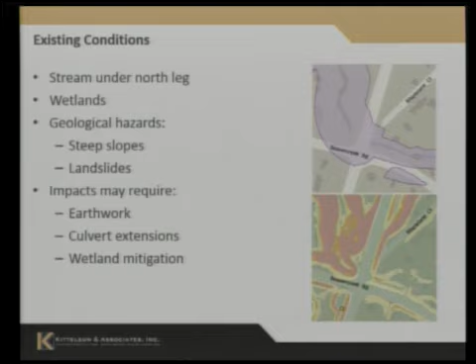That tells you a little bit about some of the facilities there, but this road is placed in a very interesting location. As many of you know, there's a lot of constraints. There is a stream that runs under the north leg of the intersection. We have wetlands surrounding that stream, both in the northwest and northeast corner of the intersection. There's a lot of steep slopes and geological hazards. There's been some landslides that have occurred northwest of this intersection, up the same creek that crosses under the intersection.

And we know that anything that we do to this intersection, if it requires the back of that sidewalk to move out because we're widening the road or moving the road, anything we do that might change the full footprint of that intersection is going to likely require extensive amounts of earthwork, culvert extensions, wetland mitigation. And so you'll see that we have some pretty large ranges on our cost estimates. So to really refine that, we're looking to see which ones seem palatable, if any, before we dive to a deeper level. But we know that there's a lot of challenges with this intersection for anything that would change the footprint.

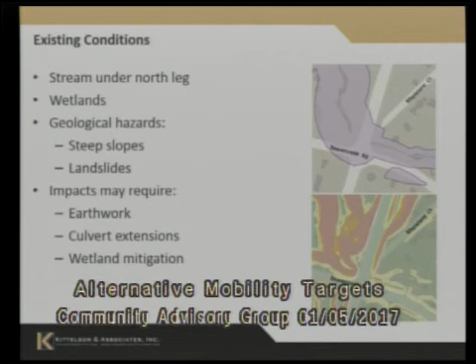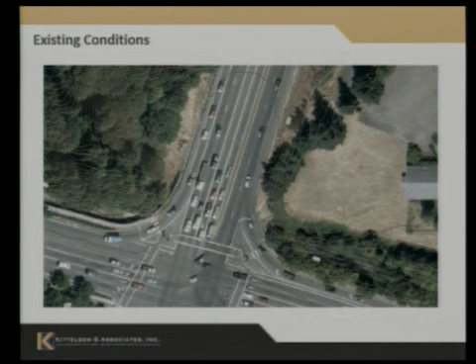So from operations, by operations we're talking about traffic. We mentioned earlier that the standard for this intersection is basically 0.99. We went back and looked at what was in the TSP when the TSP was created, looked ahead at what was projected for the intersection, and looked at traffic volumes today. What we've been seeing is that traffic volumes have been growing about 2% a year since the TSP was updated, which is consistent with the growth rates in the TSP. That was a validation for us that we're still pretty confident in the TSP projections, and we are anticipating slow and steady continued growth at this intersection.

From a safety standpoint, that is a high collision intersection. We looked at crashes from 2010 to 2014; that data doesn't become available immediately, so 2014 is the last year of full data. Statewide, this intersection is in the top 5% of what ODOT assesses as its highest crash locations. A lot of this has to do with drivers' expectations of the traffic signal when they're headed southbound coming from 205. It's a very rural expressway, as you know, and people are oftentimes startled coming upon the intersection.

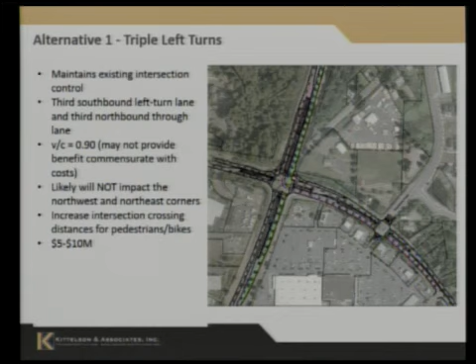At the end of this, and at the end of Susie's presentation, we'll welcome your questions and comments about any of the alternatives. We'll loop back around and walk through them one by one. And the outcome of tonight, what we're looking for, I think it's shown right there on the agenda, is, should we further investigate any? If so, which ones? So which of these should we carry forward? And then that third question, should we proceed with investigating alternative mobility targets or proceed with both? My hope would be to go around and hear from everyone before we close, but have an open discussion before that. So just wanted to provide a moment before Susie rips through these next 7 alternatives.

Good luck. Thank you. Thank you. Oh, you're right. It's a good reminder. I've got like 12 minutes. A minute and a half per alternative.

I'm going to spend a little more time on the first 4, and I'll go faster through the last 3. But yes, that is a good point. That is something that in our last hour of discussion is kind of some thumbs up, thumbs down, gut checks on do any of these solutions look like things, both from a physical standpoint as well as a cost standpoint? Does it tell you, yes, this is something I'd like the city to still consider, or no, this is just going to be far too expensive or too impactful?

So the first alternative includes constructing 3 left turn lanes coming off of 213, southbound lefts, so coming from 213 onto Beaver Creek Road. And the pink and the green doesn't mean anything in particular other than these are the new lanes. So it's triple left, southbound left, and so that would require some widening of 213, a little widening here to accept that left turn, and that third lane would probably have to extend all the way to the last shopping center driveway. And then in tandem with that, we would construct an additional northbound through lane on 213.

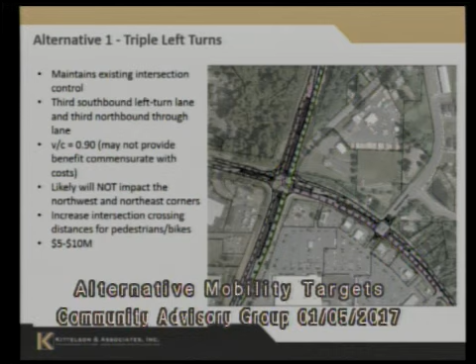We think it is likely to not impact the northwest and northeast corners. We think that this widening can be done within the existing back of pavement. It does increase the crossing distances for bikes and pedestrians on essentially three legs. It would make this crossing wider, as well as this one wider when we add the through lane.

But our cost estimate on this is still high, but I'm calling it the mid-range for today, in the $5 to $10 million range. And as I said, a lot of that has to do with whether we can do this with or without impacting these retaining walls.

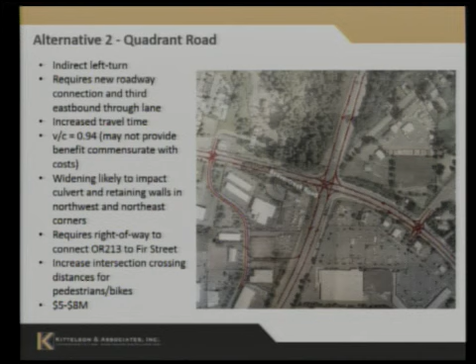Alternative 2 is called the Quadrant Road. Essentially, it would be instituting an indirect left turn. So that means you would no longer be making a southbound left here. To make this southbound left, you would go through the intersection, make a right turn, make a right turn, and come around. So this was really only getting us about a 5% gain in capacity.

And what we learned through the advisory committee meeting was that this property right here has a development application that's been approved. So this property is essentially under development at this time, not making it as great a connection as it looks in this aerial. And there are some problems moving it further south with developments, and moving it further north is just not enough distance from the intersection. Our technical advisory committee didn't feel really positive about this alternative, but they thought it was interesting.

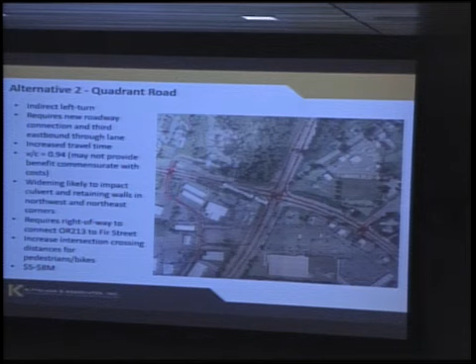One of the drawbacks is that now, instead of making a left turn here, those people who were turning left now have to go through the intersection twice. So it does provide some benefit, but I don't know that the cost benefit is necessarily there.

Susie, if we could share that the technical advisory group did recommend, is it 1, 4, and 6 to be carried forth? Did I get that right? Just to provide the benefit. So maybe after we go through 1 and 3. 1 and 3 just going forward. Yeah. Okay. So the committee still had concerns with alternatives 1 and 3, but for context, for your own thoughts, 1 and 3 seemed to be the best solutions of these 7 to the technical advisory committee.

However, ODOT raised concerns with the CFIs. They didn't say that they wouldn't approve them, but at the staff level, they basically said that these are very problematic, I don't know if we would approve these. They do exist in other places around the country.

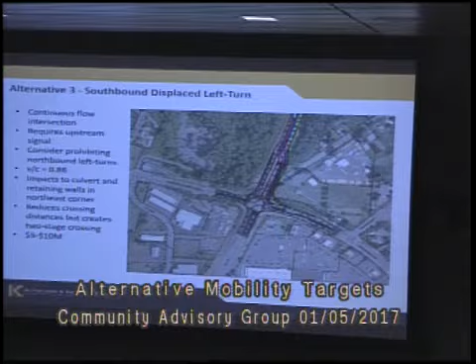Sorry to interrupt there, but I just wanted to say that you have the benefit of the technical review coming before you. Thought I'd just share, because I know we're getting strong reactions against number 2 already. Just wanted to say you're not alone. So thank you. Keep going.

And there was quite a bit of interest in alternative 3, which I'm going to be talking about right now. But I think the concern was still that it is a new intersection type, but I think it's one that is going to be starting to show up in more locations. They would be pretty new to Oregon, but they are very popular in other parts of the United States, not just internationally. But there was concern about whether this could be done within the retaining walls or not, and that would be a pretty major factor in the cost estimate. So 1 and 3 look like having the most potential, still with some concerns, but maybe warranting additional investigation.

Yep. So this is what we call displaced left turns. You're still allowed to turn left at the intersection, but what this treatment does is you have a second small traffic signal upstream. If you want to turn left here, you get into left turn lanes early, and you stop, or you might have a green, and you cross the road, and you come here, and you wait till you have a green. And then essentially the left turns get to go on the same green that the throughs get to go on, southbound as well as northbound throughs.

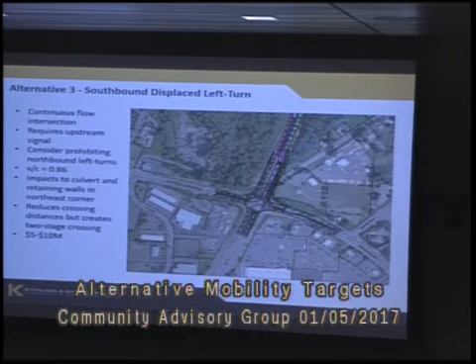So now you're able to move southbound lefts, southbound throughs, and northbound throughs all at the same time because you have moved those lefts to the other side of the roadway. And you've done that at a time when there was a gap in the signal, so you're really not creating additional delay to get through that intersection. They're coordinated. It's essentially the same signal. You end up with a different signal head here. I know this sounds technical, but it's the same controller, so it's one intersection, and you're controlling everybody together, but you're crossing those lefts in advance.

This would also require the construction of a right turn lane. And I think the real concern from a constructability standpoint on this was the widening, any potential widening in this section of 213. So this VC you'll see is 0.86. That's the biggest bang for those dollars that you've seen out of any of those alternatives that I've showed you so far. So I think this is what's really attractive.

It's a big gain in capacity for not a major improvement. And in other locations where you don't have these kinds of geographic and environmental hazards, this type of improvement is much more economical.

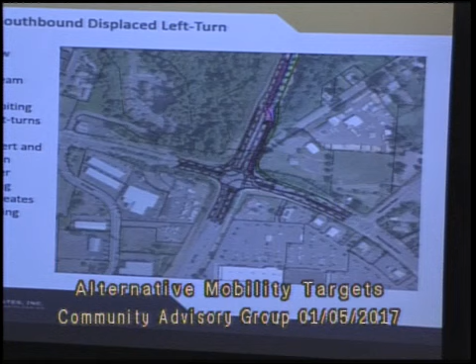So alternative 4 was essentially doing this type of treatment for 2 legs of the intersection instead of just one. So I already showed you how the southbound lefts would cross over, and they would be able to travel with the northbound and southbound throughs. This is showing that we're actually doing it for the eastbound lefts as well. Eastbound lefts, they get into their left turn lane early, right here. They have a signal that tells them when they're allowed to cross over into this storage area, and then they get a green and can turn left at the same time as these movements.

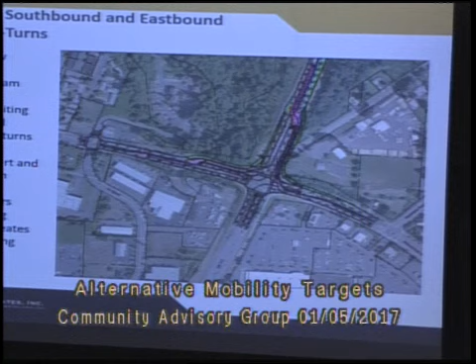And so this resulted in a volume to capacity ratio of 0.81, a little bit of improvement over doing just one leg. But this definitely has pretty severe impacts to the retaining wall and the wetlands and the topographic impacts here, which is why this has a substantially higher potential price tag.

That's the end of the at-grade intersections. I'm going to buzz pretty quickly through 3 interchanges that we looked at. We looked at a full diamond interchange. So this is a pretty traditional interchange. You've got 4 ramps, off, on, off, and on, controlled by 2 intersections.

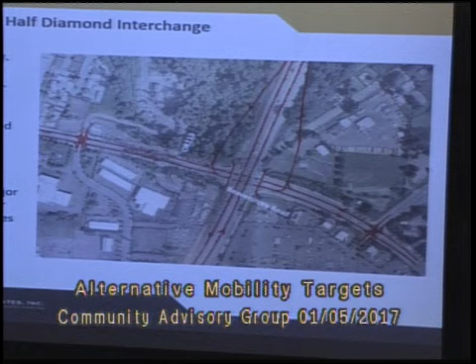That half interchange would really include a southbound off-ramp and a northbound on-ramp, and you lose your northbound lefts. Northbound lefts would then have to occur all the way down at Molalla, and your westbound lefts would have to occur at Meyers Road extension. So you're losing functionality with this type of half interchange. So you'll notice there's no way to make a northbound left or a westbound left.

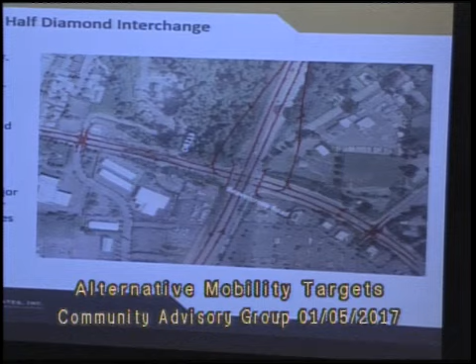If you wanted to turn left from here, you're going on the on-ramp. Or if you're coming off the off-ramp, you can go both directions. But half interchange with this configuration, half the movements. Still at a very high price tag, although a good volume to capacity ratio.

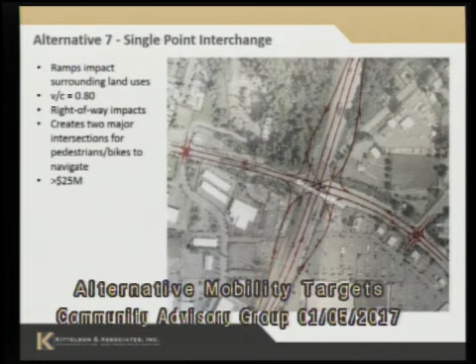So then the question was, could we do a single point interchange, or there's another variation of this called a tight urban interchange. So some people are wondering, well, can't we just do a really small, tight one without having so many impacts as the first interchange? But I think you'll see that even if you have it really tight, you still have very significant impacts to existing development and the wetland area.